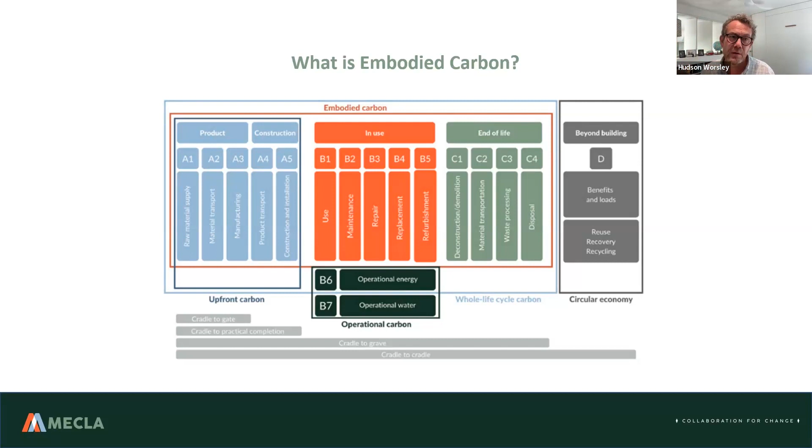You'll hear those in the carbon bubble talk about A1 to A3 or A1 to A5 - it's really talking about what process is being undertaken in product development, in construction, in the use of an asset, and then at the end of its life. Ultimately, we want to be looking at circularity, which is that whole diagram, keeping resources in the economy in use to be as efficient as possible. Next slide, please, Alexi.

All right, so why is MECLA worried about embodied carbon? Well, it's not just MECLA, but we've formed this alliance, this collaboration, to look at embodied carbon because there's been a lot of effort over the last 10 to 15 years to reduce the operational carbon from the built environment. These slides come from ThinkStep, who worked on behalf of Green Building Council Australia.

They found that at the moment, in a major commercial building, 84% of emissions are operational and 16% are embodied carbon. But if we don't address embodied carbon and continue to address operational emissions, those numbers will flip. By mid-century, we'll be looking at 85% of a building's emissions coming from embodied carbon. So to catch up with all the effort and good work being done around operational efficiency, we've brought a spotlight onto embodied carbon - and that's us.

From the materials themselves, the bar chart on the right shows how embodied carbon is currently made up, and that unless we act, the carbon from chemical processes and process heat will grow. Electricity's yellow sector slims down, but the others grow and drive that overall increase if we don't act. So we're acting. Next slide, please, Alexi.

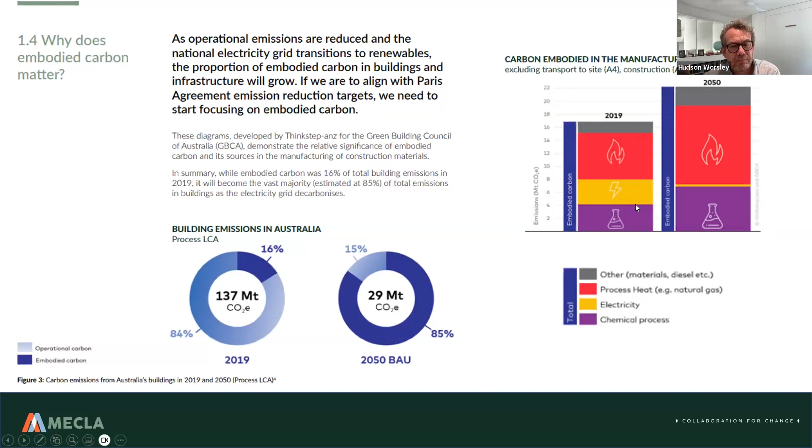Local government has two big levers: the capital works and procurement policy of council's own operations—roads, pavements, stormwater, and whatever their remit is. Regional councils also doing potable and wastewater, but all of those infrastructure types have large embodied carbon numbers. Working on that is one lever.

The other lever is as a planning approval authority, helping shape what is built within a local government area. The MECLA subgroup working with local governments is really targeting that capital works and procurement side of things, but also important—we'll be hearing today a fantastic example of using planning levers to drive reductions in embodied carbon of built form within an LGA.

So what might the challenges be for local government in embodied carbon? We're coming today with people, ideas, and examples from around the country, very aware that getting out of the metro parts of Australia, regional locations will have limited and not full access to the low carbon materials available in major metro centres. So getting out of the cities, there are different procurement challenges than for someone operating in one of our big cities.

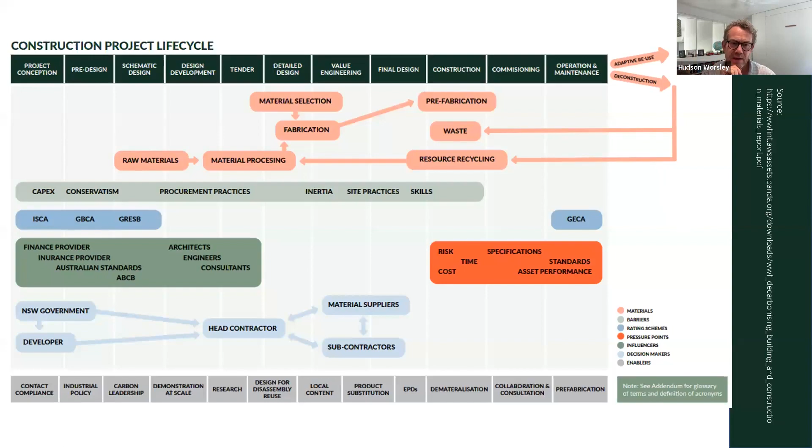And so this ecosystem diagram was born. It's been rigour-tested by many of our members—happy to say we've got 155 members of MECLA, and I think most can identify themselves and what they do on this diagram. Please have a look at it afterwards; all of the materials today will be available on the website. I'll encourage you to see how you can use it to push the lower carbon agenda in your own organisation.

So we're really trying to capture the ecosystem to be able to build change, build momentum, and act together. That's what this slide really shows.

Again, for long-standing members, bear with me, but if you're new to MECLA, welcome. This is us—we've set about to drive reductions in the embodied carbon in the building and construction industries, to bring the trajectory of emissions down onto a Paris-aligned target, recognising how complex it is and that a circular economy is where we need to get to.

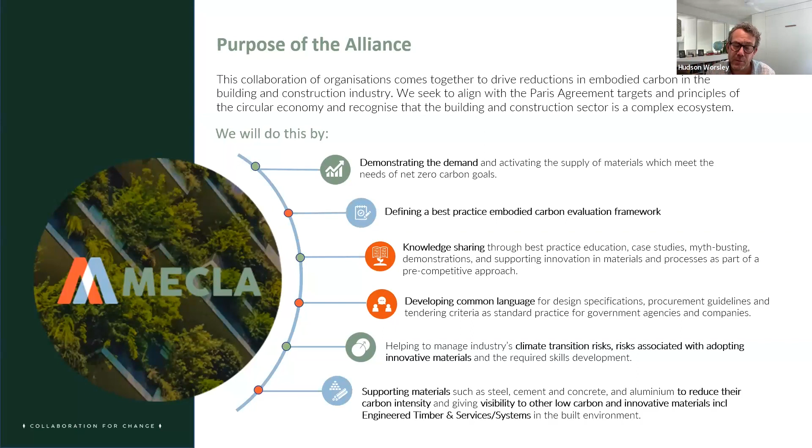We're supporting materials to get their story across: steel, cement, concrete, aluminium, other materials, engineered timber, building systems and services. They've got a story to tell as they go down their emission reduction journey, and helping understand that supports the early movers. That's why we have our working groups on materials. So that's what we're about, that's what we're doing.

Thanks, Alexi. Now here's a part of the MECLA value proposition that I'm really proud of. Have a look at our resources page, where you'll see links to our publications, a couple of dozen case studies. You have the opportunity to sign up to our newsletter that Kati and Alexi prepare every month or so. It's just fantastic to see all that's happening across the ecosystem in the spirit of collaboration. So after this, please do check out these slides.

Thank you for steering me through that, Alexi. Really appreciate that. What I'll do now is I'd like to introduce our first speaker.

Paul Whelan, from the City of Melbourne. He's the Zero Carbon Operations Lead, working in city development with low embodied carbon materials and the process of measurement. This role sees Paul work across the council, in areas of climate change mitigation and those projects, electrification of council assets, carbon neutral major events, sustainable procurement, and is also the council representative with us at MECLA. So Paul, you've authored the City of Melbourne's emission reduction plan. Can I hand over to you to talk through your experiences and share with us what you're doing with the City of Melbourne, please?

Thanks very much, Hudson. It would be my pleasure. Do you want me to start my video as well, or we're happy just to see the video presentation? Video, please. Okay, here I am. Please let me know if my sound drops out or gets a bit low. I think I have a below par headset here.

So thanks for the introduction. I have been looking at embodied carbon at the City of Melbourne for a bit over 12 months, with my main focus being on measurement. So today, in the next 7 or 8 minutes, I'm going to take you through a bit of a journey on how we kind of started, what our first measurement project looked like, and where we're up to today.

So like I said, a bit of a background on why we began looking at embodied carbon. We have actually undertaken 2 major measurement pieces of work. And I guess what I'd like other local government officers to know is that getting the measurement part right to justify the work that you want to do in reducing embodied carbon is fundamental. You want your numbers to stack up when you start putting together business cases, asking for funds for projects and changing the way that you do your work.

Often it's the local government officers in climate change or sustainability branches that are leading this. So getting a grip of the data from your infrastructure or capital works branches is really important, so you understand the quantum of the problem.

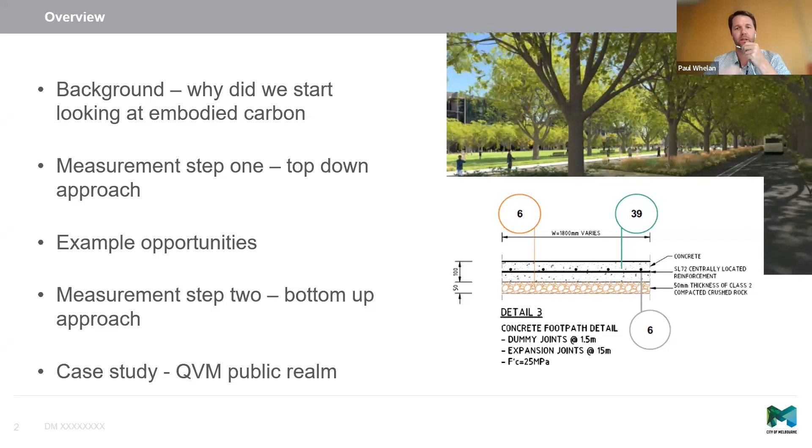So as a carbon neutral organisation for over 10 years now, we have an active emissions reduction plan. This sets out broadly our emissions reduction goals over a 5-year period, and it was last refreshed in 2021. What we wanted to do in the emissions reduction plan was not just look at what our regular scope 1, 2, and some scope 3 is, but we wanted to look in each iteration of this emissions reduction plan at an area of innovation.

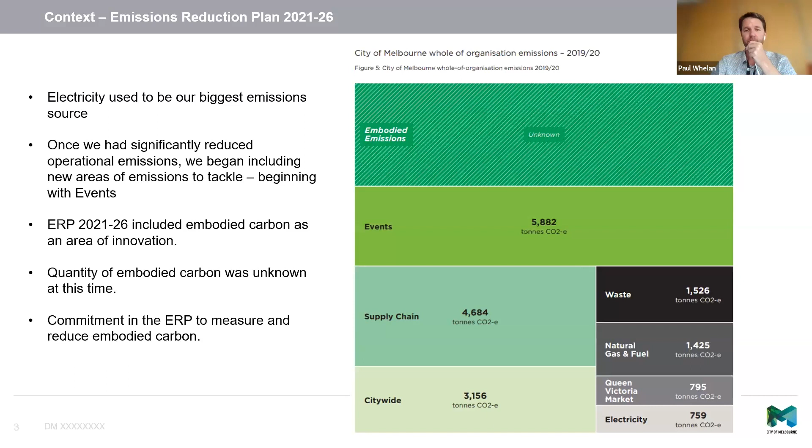Our first step was to commission an embodied carbon footprint of our forward 4-year capital works plan. We engaged a quantity surveying firm who undertook that work for us. They looked at our 4-year forward capital works plan and our projected spend by asset type. Being a QS firm, they had a lot of knowledge around the different material inputs into those kinds of projects. By marrying their knowledge of material inputs to projects with our budget, they were able to come out with a pretty detailed, albeit top-down, carbon footprint. For example, based on their knowledge and experience, they know how much concrete, steel and bluestone would go into $1 million, $2 million or $10 million of footpath renewals, and what the other costs associated with construction and contingency should be. Based on those financial outputs and their knowledge, that top-down embodied carbon footprint was developed.

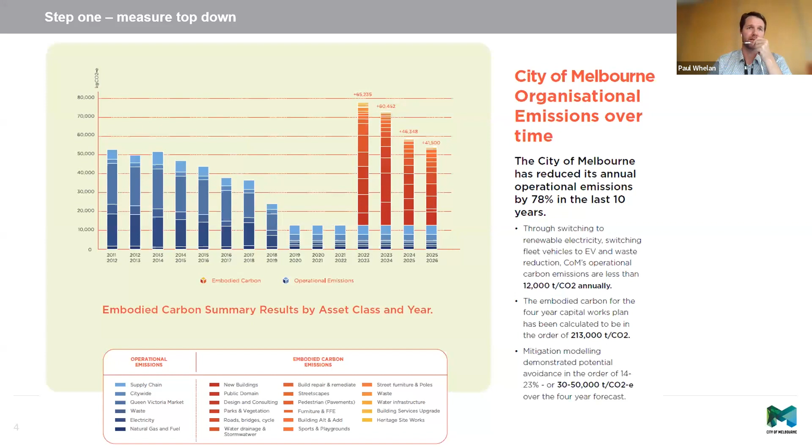What we also learnt through that top-down measurement piece was that broadly, the types of projects we undertake can be separated into two buckets: civil infrastructure stuff and buildings. So if we jump onto the next slide...

Each of the two project types we typically do have different distinct interventions. For streetscape projects, the interventions are simple material substitution, which can achieve reasonably significant emissions reduction. We saw that as the best place to start, rather than looking at building projects which are inherently more complex—building a new library or aquatic centre, the interventions for reducing embodied carbon there really start at the design phase and involve a lot more decision makers. Whereas civil stuff—footpaths, roads, curbs and channels—are very simple projects with a lot less inputs.

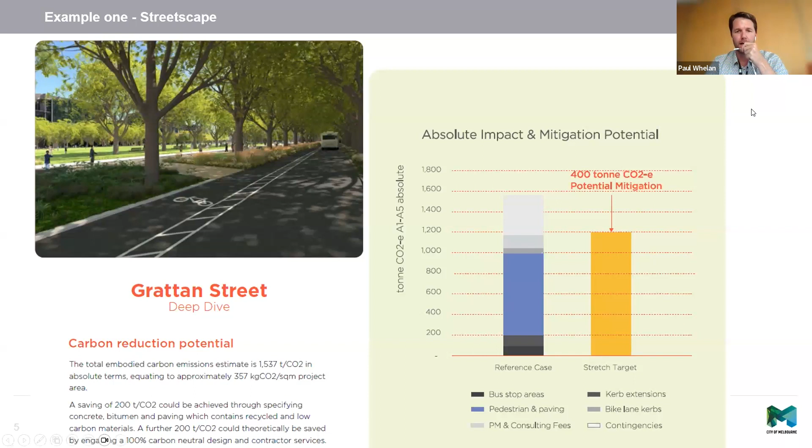Okay, let's jump to the next slide.

Moving on to the next level of detail, what we call the bottom-up measurement—unsurprisingly, we decided to tackle that simple stuff first, the high volume work. So what we did was take our top 10 standard drawings by spend. We looked back 4 years at all the infrastructure delivered based on our standard drawings, took those top 10, and did a detailed carbon footprint of them. Those top 10 broadly fit into 5 categories: asphalt road, asphalt footpath, bluestone footpath, bluestone curb and channel, and other concrete works.

These 10 standard drawings represented about 85% of our civil infrastructure services contract, and it worked out to be about $95 million over that 4 years.

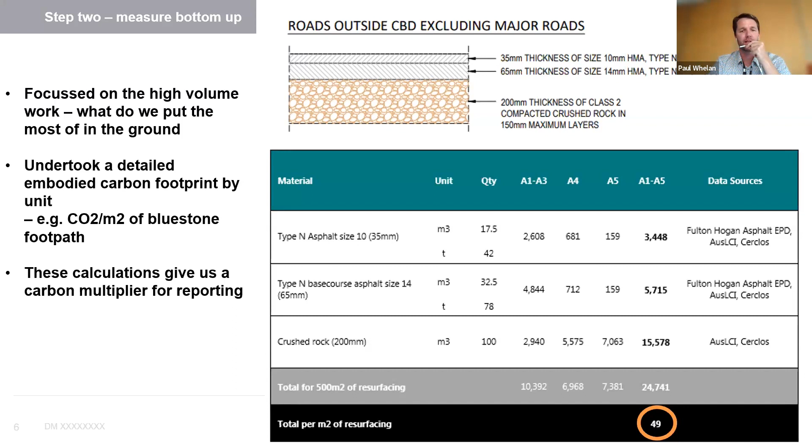Next slide, please. We also wanted to look at what the opportunity was for embodied carbon reduction from these works. It was another quantity surveying firm that did this work for us. They've looked at a number of interventions, material substitutions, and expressed what the carbon reduction opportunity is. So if you just implement one of those lines, it takes it from 49 kilograms down to 47. And so we can toggle these in and out on any project.

We also sought some guidance around what the cost implications were of choosing one or any of these low embodied carbon options, because we know internally engineering and capital works do everything to a budget. So we wanted to be able to cost in the carbon reductions and be able to dispel the myth that this was going to come at significant cost.

One more minute, Paul. Sorry, mate.

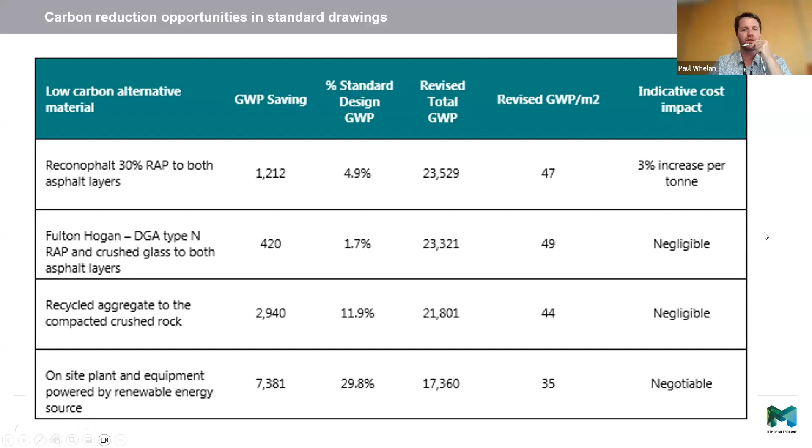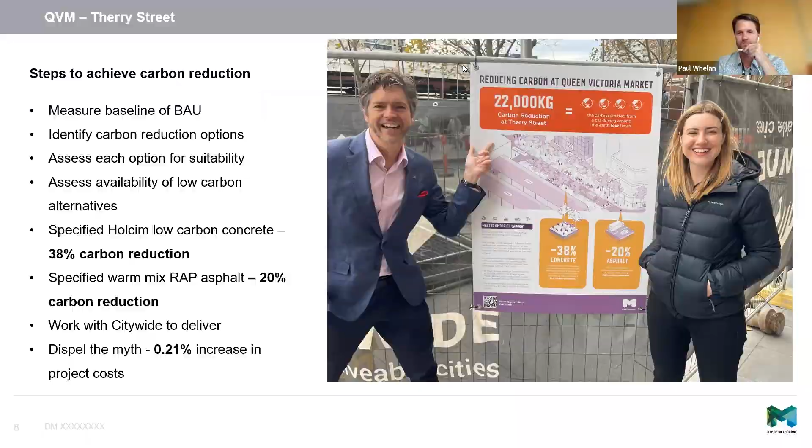Paul, thank you very much. Fantastic. I love the term you used, liability, to get the message that this is important, we've got to do something about it. Also just the way you prioritize what's going to be the biggest bang for the simplest projects and the materiality of that. I think we can all take something away. Thank you, fantastic, thanks for those insights. I look forward to you coming back to the panel discussion in a few moments' time.

Our next speaker is from New South Wales Government. Alberto Jimenez is a long-time friend of MECLA, and he's a Senior Policy Officer, New South Wales Government, specifying low-carbon concrete. He's got experience developing, delivering and evaluating programs, services and actions to facilitate improved environmental performance across office buildings, commercial office and infrastructure projects. Most recently, Alberto has worked with the New South Wales Department of Climate Change, Energy, Environment and Water, a department that changes its name pretty much yearly, but it's good to have some continuity, Alberto, and that you're still there. But growing the market for low emission building materials within New South Wales is fantastic. Also great that the New South Wales Government shares this with other jurisdictions.

So Alberto, please, tell us what you know. Really looking forward to this. Thank you, mate. And 10 minutes, I'll tinkle a cup at 9. Over to you.

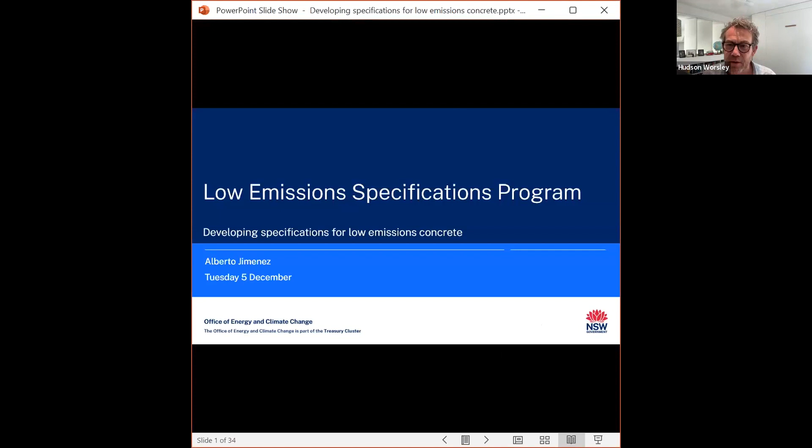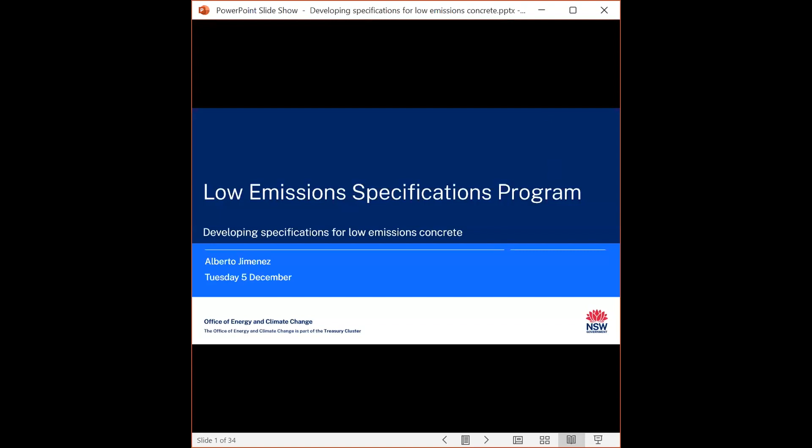Good afternoon, everyone. My name is Alberto. I work with the New South Wales government within the Office of Energy and Climate Change on the Low Emission Specifications Program. What we're covering today: most recently, we completed a project with New South Wales government agencies in which we developed requirements for low carbon concrete and updated their specifications.

So today I would like to present on that experience. If you are a council thinking about reducing embodied emissions, I hope you benefit from the learnings about the process we took to update our specifications.

I'll also talk about the updated specifications and its requirements for low carbon concrete. And lastly, I would like to flag an upcoming project in which we hope to work with councils across New South Wales to update these specifications as well.

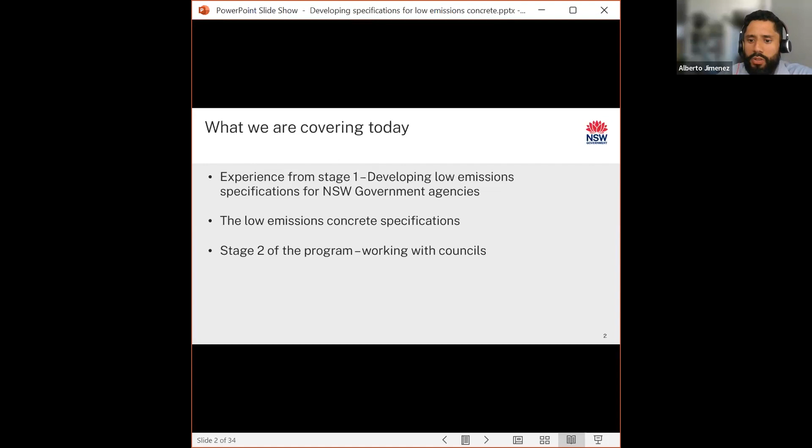If you're not in New South Wales, we will work with MECLA. So staying in touch via our MECLA working group for councils might be a great way to get some of those learnings from that project.

So I would like to talk about our authorizing environment. Obviously, we have the New South Wales net zero plan to achieve 50% reductions by 2030 and net zero by 2050.

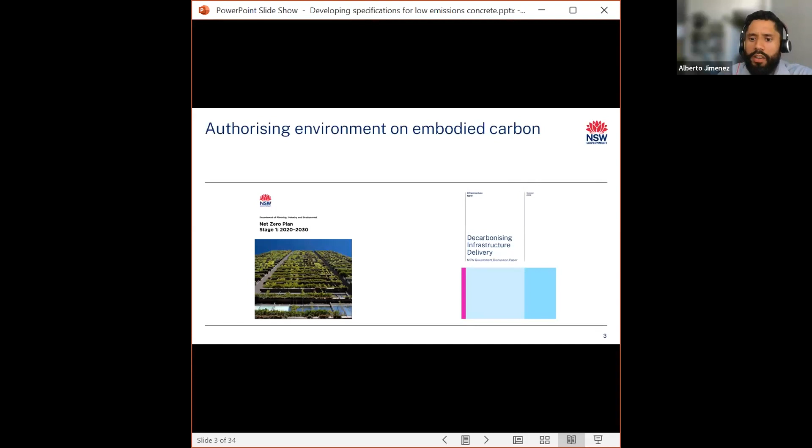But in addition to this plan, and much more relevant to infrastructure and embodied carbon, we have the decarbonising infrastructure delivery roadmap developed by Infrastructure New South Wales. This roadmap is incredibly important as it sets out a bit of an umbrella and structure around managing embodied emissions.

Most importantly, the roadmap helps agencies set in a structure, especially around measurement, providing a consistent approach to estimating and measuring embodied carbon that will be applicable in New South Wales.

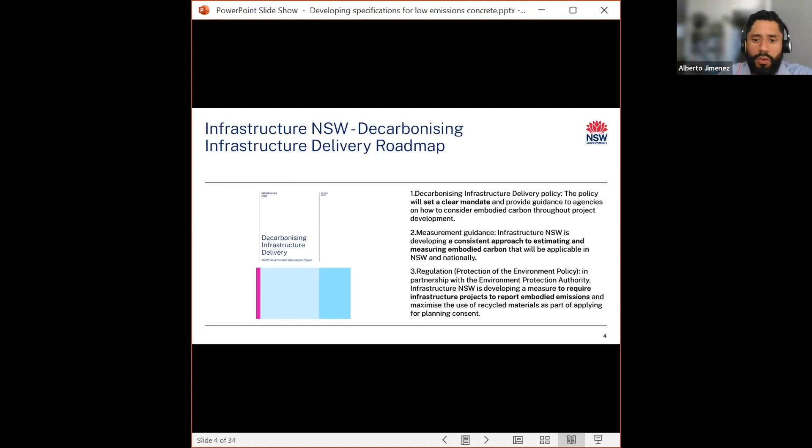My understanding is that there are discussions with infrastructure ministers around the nation, and they are aiming for this measurement framework and guidance to become national.

So a bit of context: I would like to think that if you are a council seeking to manage embodied carbon via material selections and the use of specifications, you may find yourself in a similar situation to this, perhaps unsure on how materials are specified within your own operations, unsure of where to start.

So it is important to have that framework to work on measurement, procurement, planning, designing out materials, and understanding that the use of specifications for material selections is just a small part of this pie.

You may also be unsure about the availability of low emissions building materials in areas outside metro regions, and aware of emerging supply challenges with fly ash and slag.

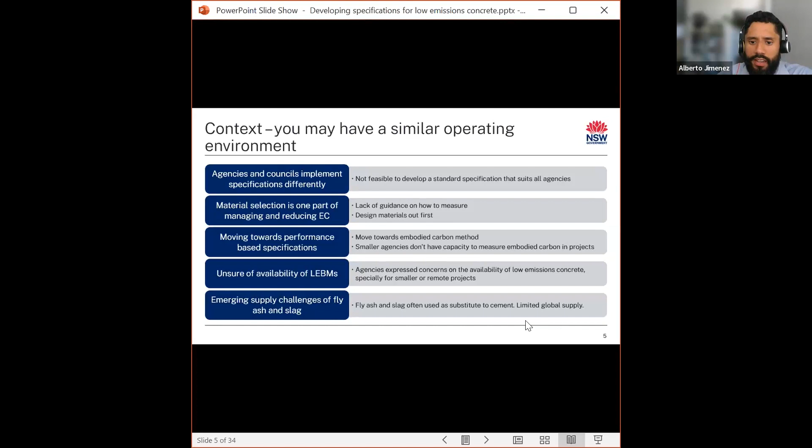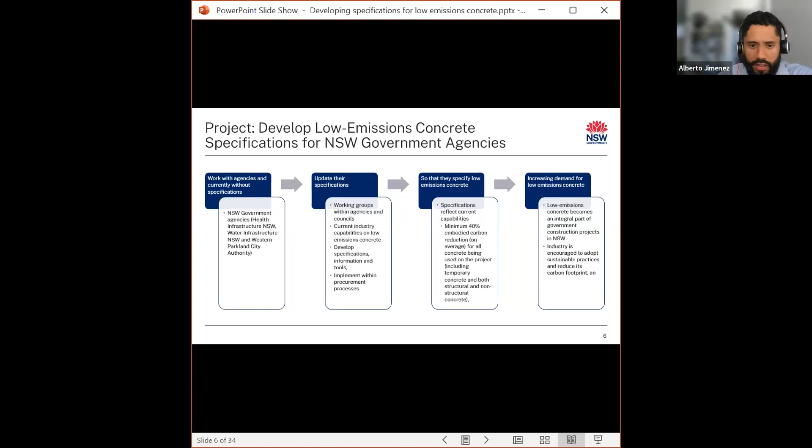So with that context, 12 months ago, we set out to work with New South Wales government agencies to update their specifications and include requirements for low carbon concrete so that they can better specify low carbon concrete in their infrastructure projects. We did this, and we partnered with Arup to develop the project methodology.

We worked with 3 New South Wales government agencies during stage 1. These were the Western Parkland City Authority, Water Infrastructure New South Wales, and Health Infrastructure New South Wales. And we set up working groups with each of the participating agencies.

Ideally, this included sustainability people, as well as project teams in charge of the implementation of the specifications, as well as leadership groups, executive directors, procurement teams. We had to talk about cost, risks, etc.

So after we set up the working groups, we did a gap analysis on the specifications that were currently being used and wanted to understand whether these specifications made any mention of SCM levels, etc.

In the context of councils, I understand that most councils have standard drawings for typical details, such as drainage, footpath, curbs, signage, etc. And some councils then might also have specifications.

The standard drawings usually outline requirements such as a concrete grade or strength, but they do not usually speak to any requirements with respect to sustainability, such as the use of supplementary cementitious materials or other alternative materials.

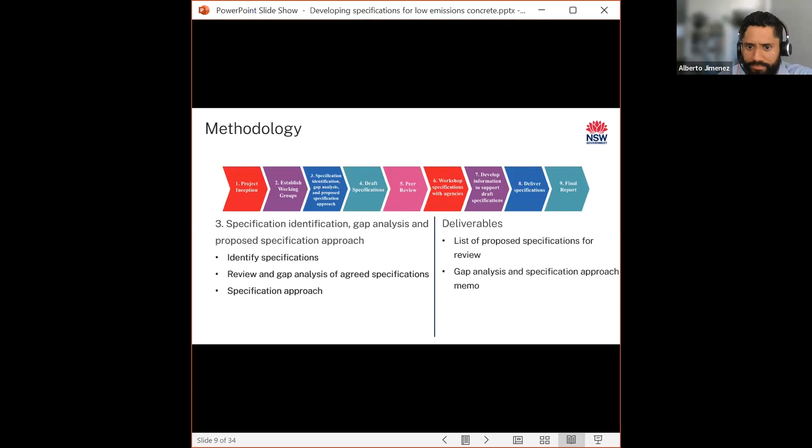So in this project, based on the gap analysis, we went then and drafted the specifications. The new specifications included recommendations to include low carbon concrete requirements.

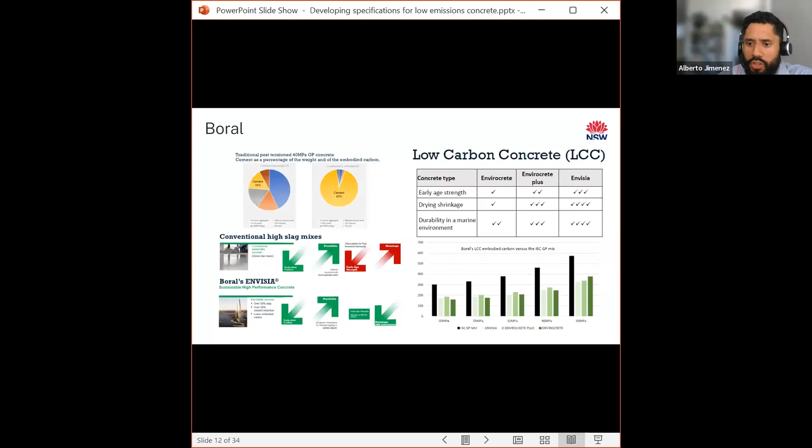And these requirements were informed and drafted by engagement with industry, and we were hoping that they would be reflective of current industry capabilities. I won't go into details, but you should know that industry confirmed availability to supply low carbon concrete as per these specifications. So we went and drafted the recommendations.

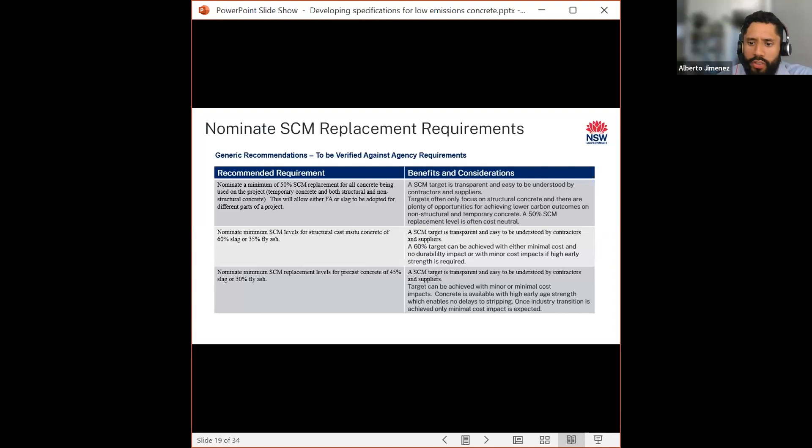These are all of them. Not all of the recommendations were implemented. It was still up to the agency to approve which recommendation they wanted to implement. So this is just a list of them.

We workshopped these specifications with agencies, and more importantly, we developed information to support the implementation of specifications. This is usually something that gets done at the end—you go through the project, and at the end, you develop the information and the guidance. But for this project, it was important that we develop those guidance and fact sheets before we were even able to engage executive directors and our leadership teams.

Given the large amount of technical and commercial questions around the implementation of these specifications, we went into battle with fact sheets and guidance ready in advance. The result was 3 agencies, updated specifications, one set of specifications, and 4 fact sheets, plus many briefing sessions to government. We'll continue to brief industry in January and February, and are happy to share the package of specifications and fact sheets with the product group after this presentation.

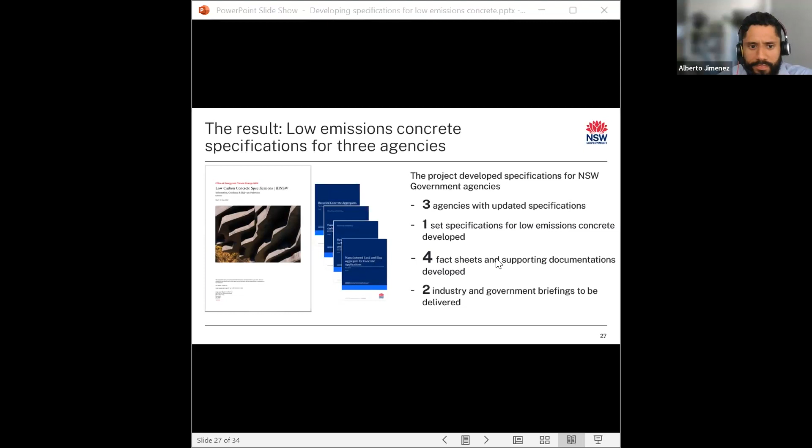Now, the specifications themselves are the low carbon concrete requirements that we developed. These specifications set limits for the allowable amount of cementitious materials in concrete mixes and provide two options. The first is a prescriptive approach: a minimum of 50% SCM replacement by weight for all concrete used on the project.

This approach acknowledges current capabilities within agencies. We know industry is keen to push towards performance-based specifications, and we will continue to do so. But in the meantime, we need to acknowledge that some agencies, and I'm pretty sure councils, may struggle with their capability in terms of measuring embodied carbon. So until we reach that state, we give an option for a more prescriptive approach.

We also have a second approach, which is performance-based, with a minimum 40% embodied carbon reduction for all concrete used on the project. For that, you may need to use EPDs.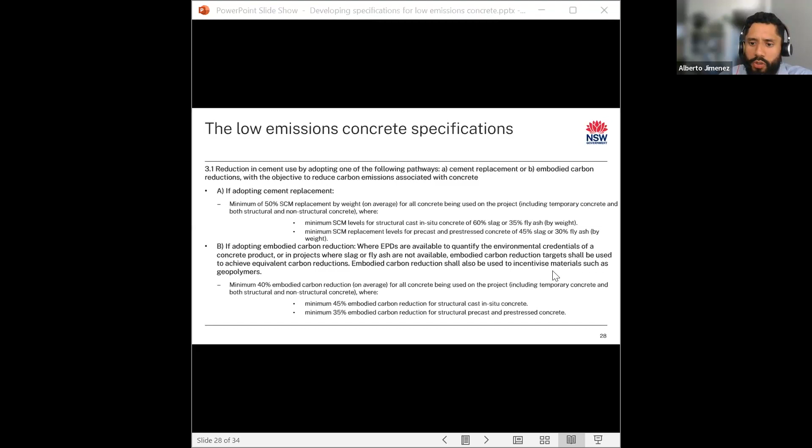The specifications also set limits for the allowable amount of cementitious materials in concrete mixes, and set targets for alternative aggregate materials to replace natural aggregates, with a focus on circularity and the use of industrial byproducts in concrete mixes. Based on feedback from the agencies, these specifications do not make mention of the use of recycled plastic, so that topic is left out.

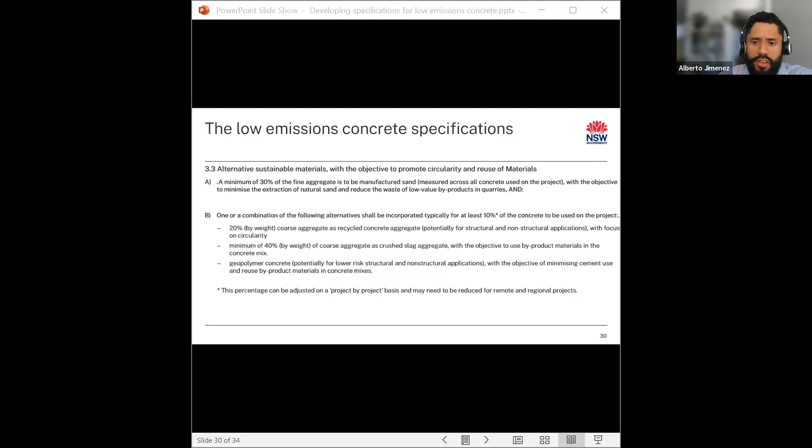That project was conducted over the last 12 months with those 3 participating agencies. The objective for the next stage of the program is to extend and replicate that work, as applicable, to councils within New South Wales, as well as any other agency we couldn't work with during stage 1. So the plan for stage 2 is to work with agencies and New South Wales councils to update their specifications and tailor the process to their needs so they can better specify low emissions concrete.

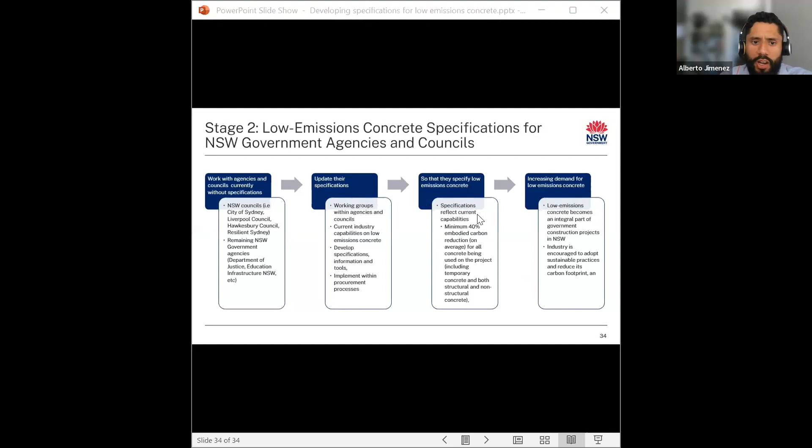In terms of context and reference, stay tuned via MECLA. We will be reaching out for recruitment and participation to councils in February of 2024. As a bit of reference, the specifications were developed and authored by Arup Australia and published by the Office of Energy and Climate Change.

Again, I reiterate the call: reach out or stay tuned via MECLA. We will be reaching out to councils for recruitment for stage 2 of the project. Let us know if you'd like access to the specifications themselves. Thank you.

Thank you, Alberto. 8 seconds to spare, couldn't have done it better. Well done. Thank you very much for taking us through the process as well as the outcomes. Fantastic to see such co-development with industry, talking with suppliers, users of materials, and tapping into consulting expertise as well. The Q&A is alive, I'd encourage everybody to pop their questions in there. Alberto, you've got some homework, get into the chat, lots of people firing up and asking questions. I think we'll be keen to read the outputs of your project, if you could share those or pop some links in. Looks like you're doing something in high demand, so thank you very much for that. I look forward to seeing you in the panel discussion as well, Alberto. Thank you, mate. Thank you, Hudson.

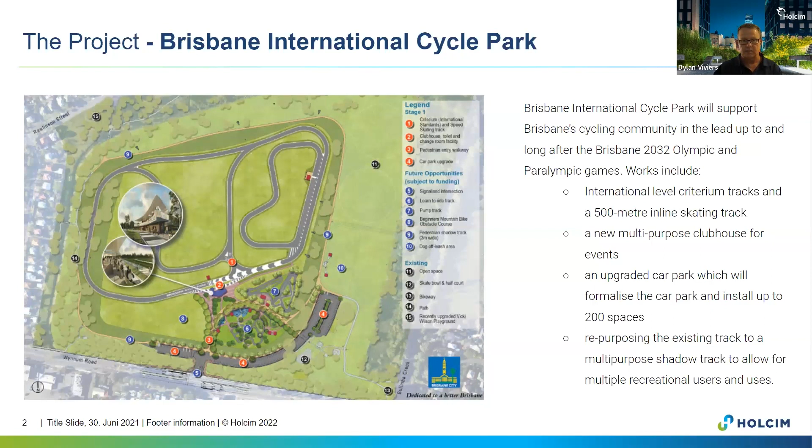So I think the key thing I want to take you through is basically the timeline of events, and I can show you some data after this. We started collaborating with Brisbane City Council back in March 2022, and that was by way of a presentation. So a cold call email to the planning and design team - basically we put on a lunch and learn session, which was very interactive, and took them through low carbon concrete, how Brisbane City Council could start to utilise it and transform some of the footpath work that they were doing.

Off the back of that conversation, over the course of April and May, there was ongoing communication and collaboration about a few different projects they had coming up. Obviously, the Brisbane International Cycle Track was one of them. That collaboration was very much about the representative within council trying to understand, from a performance perspective, how our low carbon concrete stacked up - looking at historical test data, asking for project examples, what sort of applications it could be used for. Obviously cost came into that. It was about trying to work through every single step of that process with not only the design team, but also the engineers. So we wanted to work through and build a level of confidence, and obviously try to get our product specified into the project.

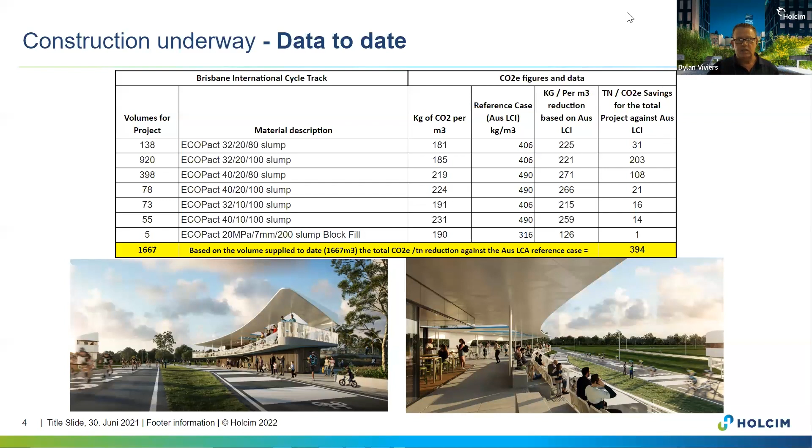So this is just some of the data to date that I wanted to share. Basically, the total cubic meters that we've supplied is 1,667 across those different mixes, as you can see here. That was the breakdown. I've had a conversation prior to presenting today with the contractor on site to ask if there's been any issues with the supply, any issues with the concrete. They haven't had any. So all the concrete's performed exactly the way they would expect conventional concrete to perform. But this is the sort of saving that they're getting.

I base these numbers on the LCI reference case. So this first column of numbers is basically the embodied carbon for each of those mixes. You can see the LCI reference case in the second column. Then the third column is your reductions per cubic meter. And the last column is tons of CO2 reduced based on the volume of that mix supplied. So 394 tons of CO2 reduced. The project's not complete, it's still in construction, but to date we've supplied 1,667.

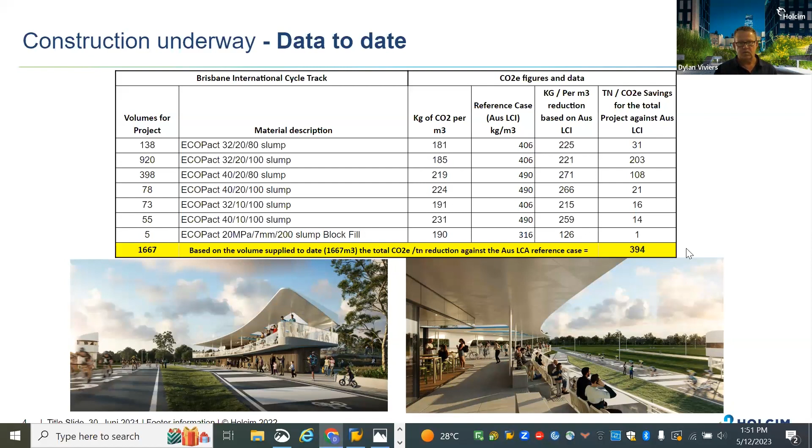So it's quite amazing when you think, to go from, in 2022, with Brisbane City Council and the 2032 Olympics that has a massive focus on sustainability, to actually delivering this project as the first infrastructure project basically linked to the 2032 Olympics. For us, it's a very proud moment, but it's also about working with all councils across Australia. I've just listed a couple of different ones here where we've actually seen local councils driving sustainability and pushing the boundaries on how they're actually specifying concrete.

So City of Logan has actually asked for a maximum. They don't want the 32 MPA to go above 210 kilos of CO2 per cubic metre. So they're actually restricting, they'll not exceed those numbers. That's quite amazing and quite innovative for a council to specify like that. We did quite a bit of work with them leading up to that project, and these are actually for precast mixes, so another hurdle altogether.

And then in WA, obviously we love seeing Holcim's ECOPact being specified, but they're starting to ask questions now of the contractors by saying, we want an extra over-price for low carbon concrete. That's amazing, and we should be doing that. All councils should be really driving hard to ask tenderers to provide that sort of pricing as well as conventional concrete, because there's going to come a time when low carbon concrete is cost neutral with conventional concrete. And I honestly believe that in the not too distant future, it's going to go the other way, where low carbon concrete is going to be cheaper.

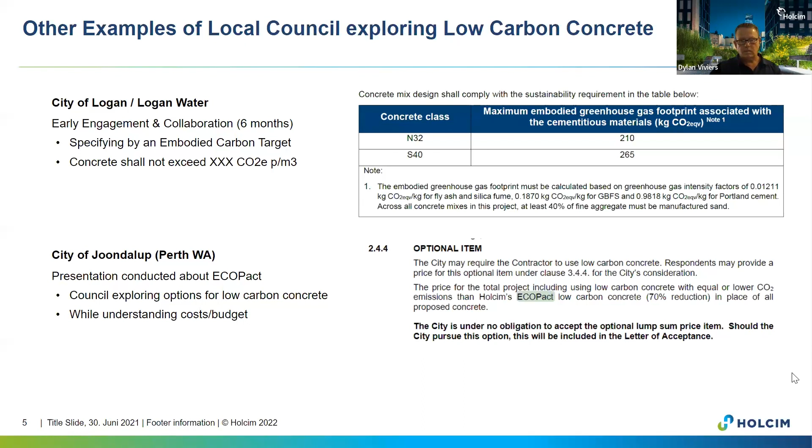And that's it from me, Hudson. Hopefully that wasn't too short.

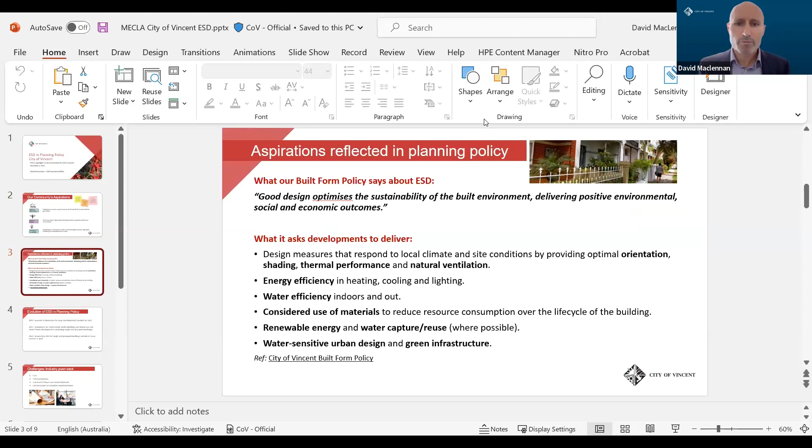The City of Vincent, like most councils, has local planning policies, and we embed our desires and objectives around the environment and sustainability into our built form policy. Over the last 10 years, we've moved from providing discretion around increased height for apartment developments, which did integrate higher sustainability outcomes, both in terms of the initial construction period and life cycle costs.

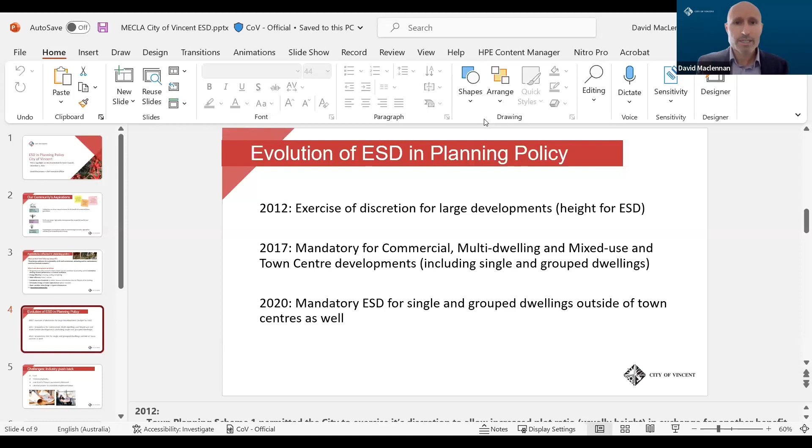Most recently, we've introduced requirements around environmental sustainability for single and group dwellings. This is somewhere state governments across Australia and local governments haven't usually gone, because you immediately start getting into issues around affordability and whether you'll make it too expensive for mum and dad to build their new home. We figured out a way to get the outcomes without impacting costs, and actually saving money for homeowners over the long term.

There's a myth or misconception that a building, whether it's a big apartment, a series of townhouses, or a single home, will cost more, and that designing it in an environmentally sustainable way will take longer and be more complex. But there's a general lack of awareness in the market among consumers about what an environmentally sustainable home means over the course of building and then living in that home, which could be 20, 30 or more years.

There are also quite strong limits to how far local governments, under their state construction, building and planning legislation, can vary the minimum standards set by state governments for both building and planning. Most state governments mandate quite consistent planning schemes which we all have to work within. There are state planning policies, and it's quite hard for local governments to vary or be inconsistent with those. In Western Australia, that's called the residential design codes.

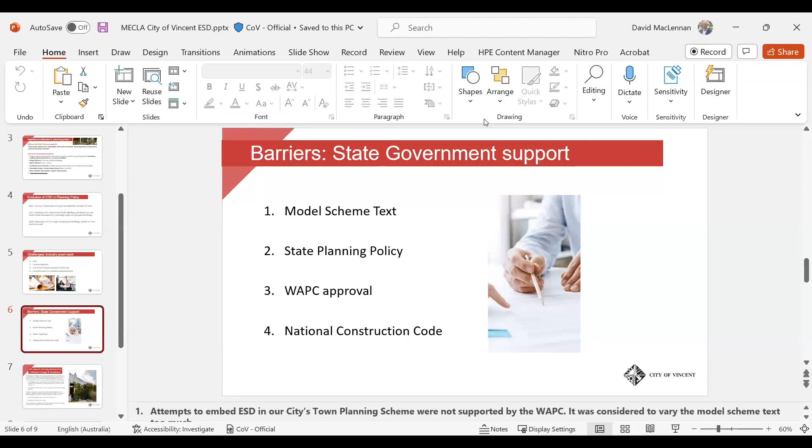Most councils will require the state government's approval for any variations to state government standards. And I've already mentioned the high degree of alignment on the National Construction Code and the very slow process of raising those minimum standards to require environmentally sustainable buildings over the long term.

What the City of Vincent did, in terms of trying to specify and enable more environmentally sustainable outcomes in the single and group dwelling designs we were receiving as a planning authority, was go through a long process over several years to figure out whether you can prescribe certain things around energy and water and come up with a checklist.

But we always run into that situation, particularly in the City of Vincent, where we've got very small lots. It's an inner city area, not a greenfields subdivision area — we're not building from scratch on cleared lots. We're trying to retrofit new buildings or refurbish or extend existing dwellings within a very confined space, tight blocks, tight lots. Over 10 years we've seen homeowners trying to get as much house onto those small lots as possible, leaving no space for green areas, mature trees, or planting new trees. So we're concerned about the urban heat island effect and the loss of tree canopy on private property.

What we tried to do with our planning policy is set new requirements around energy and water at that early design stage. We worked very closely with a local company in Leederville in the City of Vincent called Cerclos — it was originally called eTool — to come up with a simple, user-friendly life cycle assessment for a single or group dwelling.

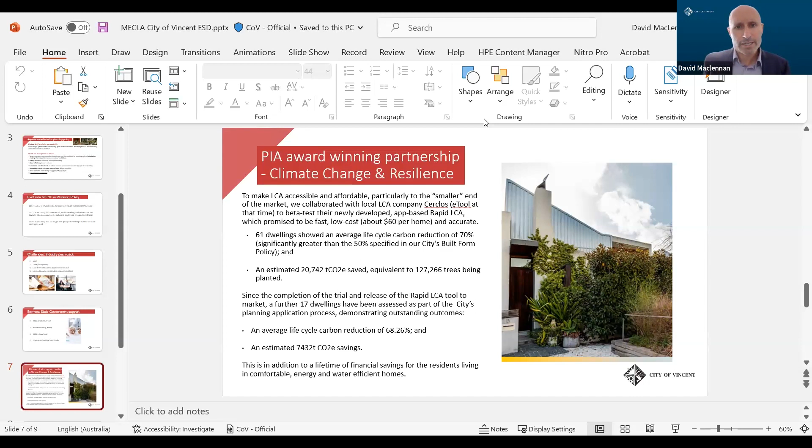All of those different interventions we can now capture early on in the design process, which means we're getting much better designs and much better applications up front, which is helping and improving the assessment process. And we're seeing much better outcomes on our streets in terms of the buildings which are being built.

We're now taking that one step further. We've got a series of education materials, which I mentioned is an issue for the community, trying to increase people's level of understanding about how to build in a sustainable way. And the next step that we'll be launching in the next few weeks is providing an advisory service from the city's own design review panel to assist potential developers, people thinking or planning to build their new home, to be able to access an environmental expert from our design review panel.

We will also reduce the cost of the development application fee if you submit an application which meets those targets in terms of the environmental sustainability objectives in our built form policy. And we've agreed to fast track the assessment process for those applications as well. We're calling it our green track assessment process.

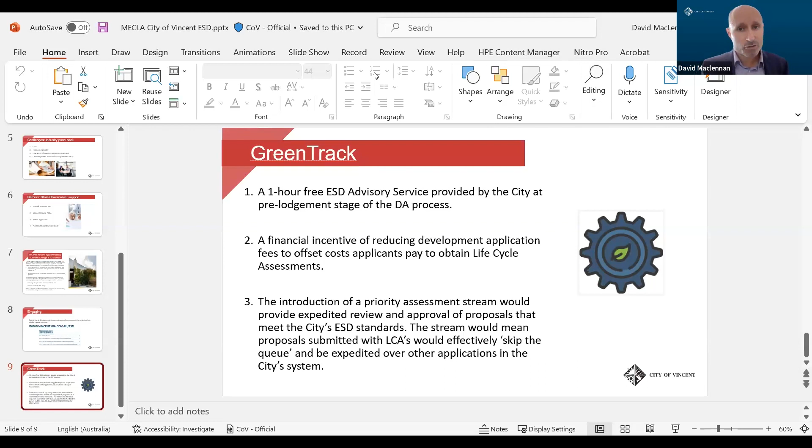And we've seen that this works. We've seen that it doesn't add extra costs. It actually is going to save money for people living in those homes over the next 20 or 30 years. The process and the tools that I've just talked about are infinitely replicable across local councils throughout Australia, and I'm looking forward to discussing it more in the panel session.